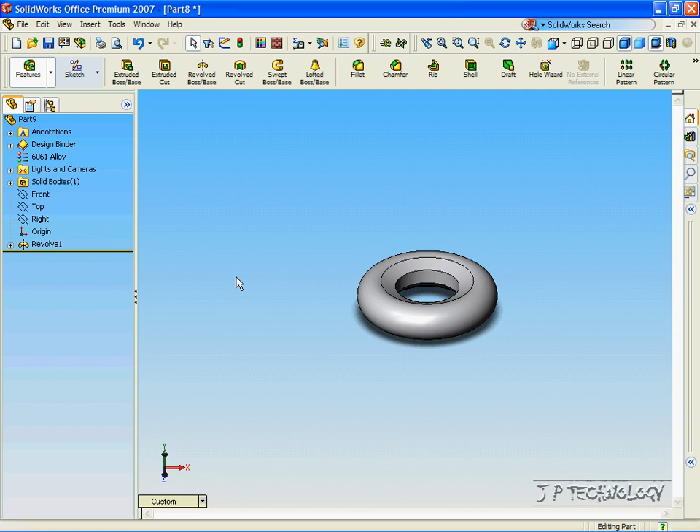Now, the parts that we made in tutorial number 4, we're going to use in tutorial number 5, and we're going to cut them. Press Control Tab and you can flip through the parts we just made before. Now let's go to the pulley wheel, and let's click Front View.

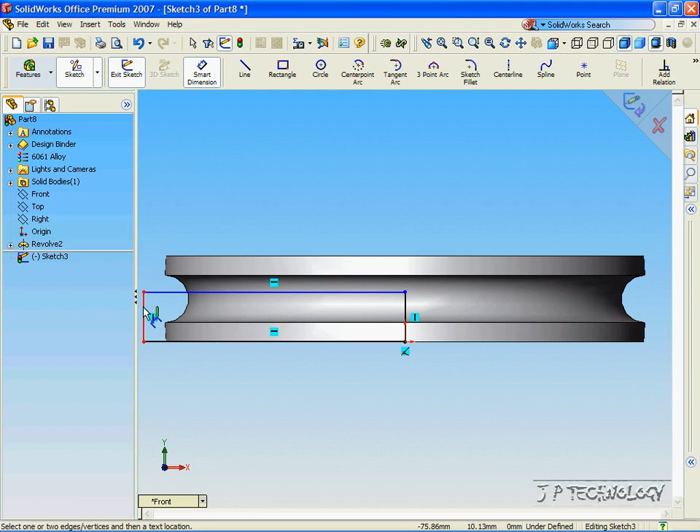Click the front plane, and click Sketch, Rectangle. From the origin, click it and go out until you're totally outside of the pulley. Click there. Now click the Smart Dimensioning tool and click the top line and the bottom line, and we can make the height. For this, let's make it 10 millimeters. Click OK.

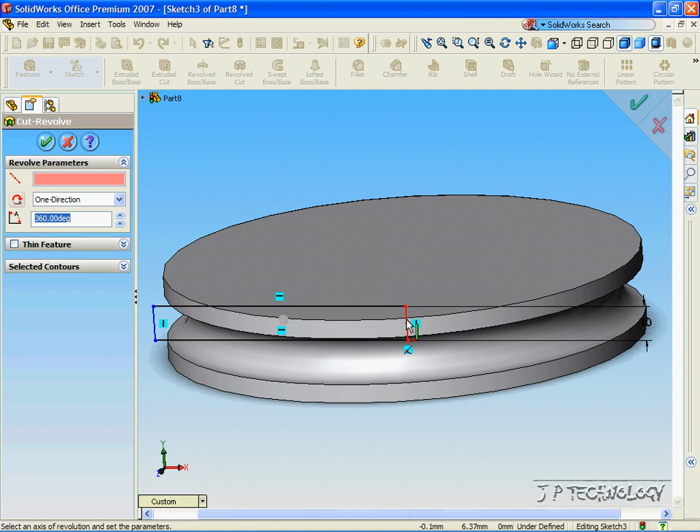Now click Feature, click Revolved Cut, and just like how we did before with the pulley, the axis of revolution is going to be that line inside there. Now click that, and we can see where the revolved cut's going to go around. It's going to go totally around, and it's going to cut what we want. Now click OK, and we've revolved cut the bottom of the pulley wheel there.

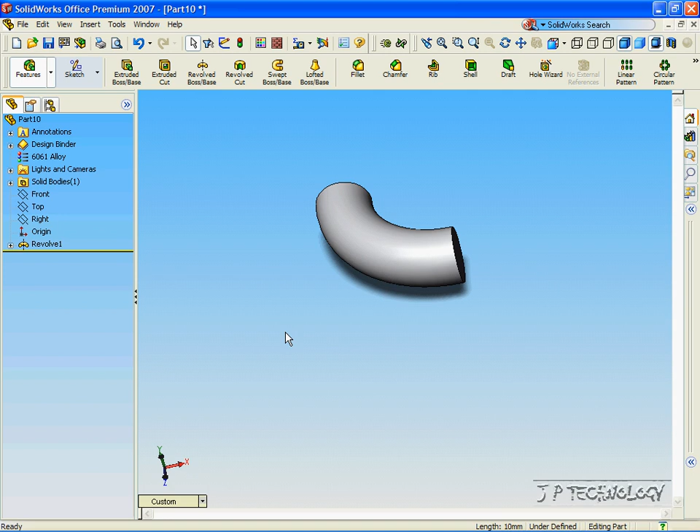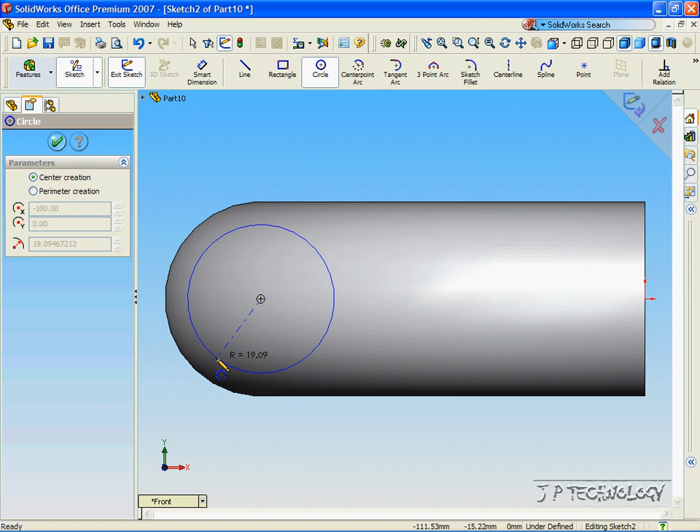Now press Control Tab, and now we're at the 90-degree bend. Click Front View, click Front Plane, and click Sketch, click Circle, and move it onto the outside until you can see the circle that we made from before. Now click the dead center of that circle, and click there, and let's make it 20 millimeters. Click Enter.

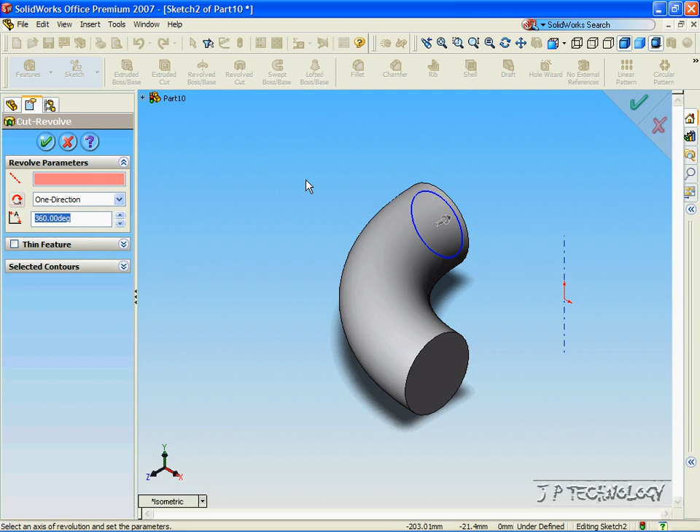Click OK. Now click Isometric View. Now, instead of drawing a temporary axis in like we did before, all we have to do is click View, click Temporary Axis, and we can see a temporary axis that's made with that circle. Now click Features, Revolved Cut, and click that temporary axis that we just put in.

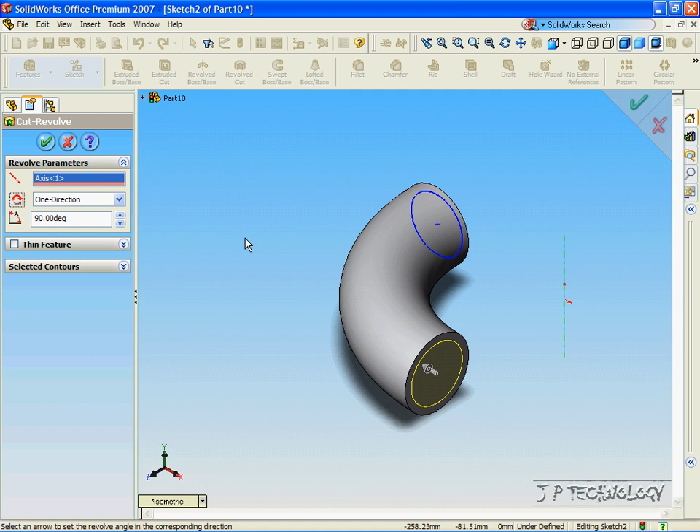And with this, you can switch directions just like the extruding cuts. Let's make it 90 degrees again, just because that's all that we have. And when you flip it, you can see it flips both ways, and that's the way we want it going. Now click OK, and we've cut all the way through it. So now our 90-degree bend is an actual pipe, and there's a hole through it.

Now with this, there's also an easier way to do it. Go into Isometric View. Instead of doing a revolved cut and then from the revolved base that we already made, we can actually just make it from one revolved base. I'll show you how to do that right now.

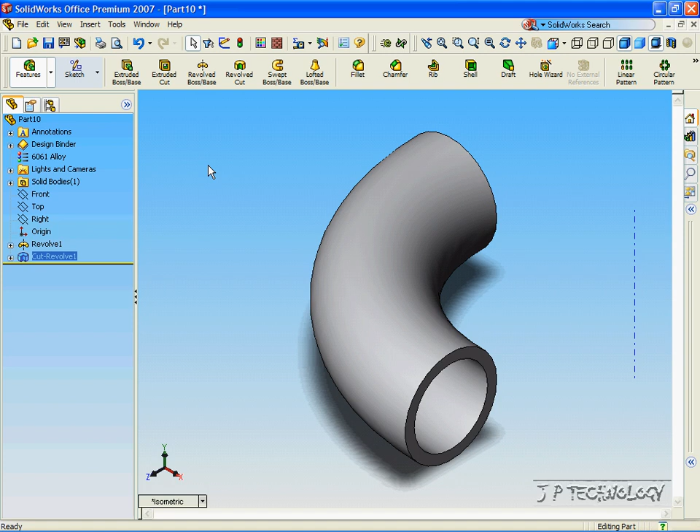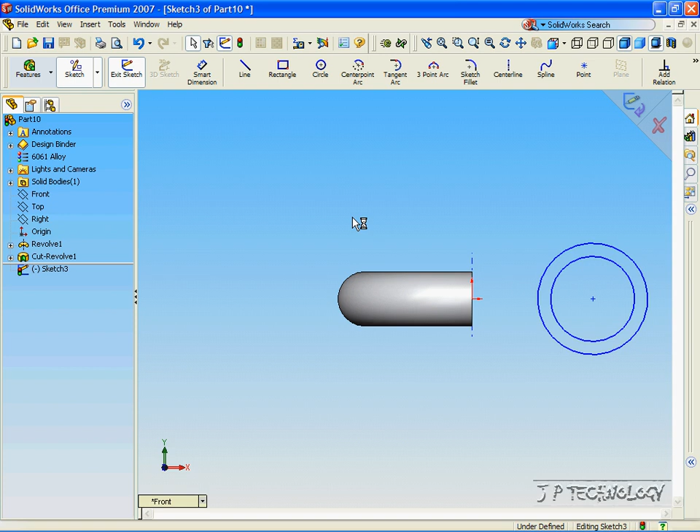Click Front, click Front Plane. Now zoom out a bit. Click Sketch, click Circle. In line with the origin, make one circle, and make one circle inside of it. Click OK. Zoom out a bit more, and let's make a temporary axis to the side of that.

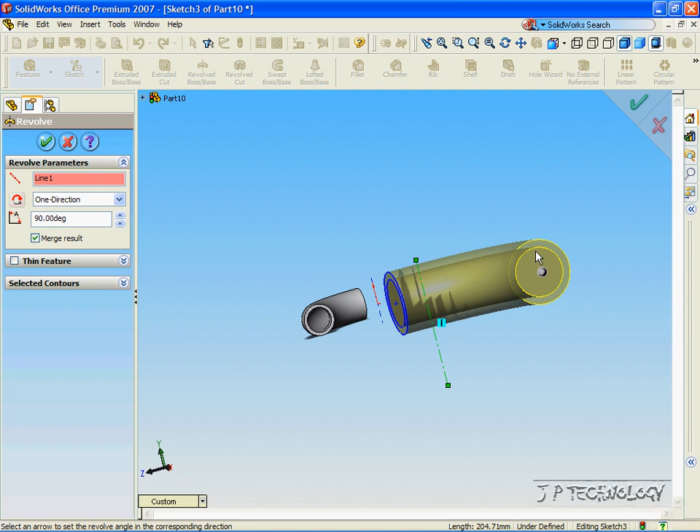Click Features, click Revolved Boss/Base, and let's show the 90 degrees. This time it's just going to do the inside. It's not going to do the big circle—it's going to do what's in between the big circle and the small circle. Now click OK, and we've made a thin-walled pipe.

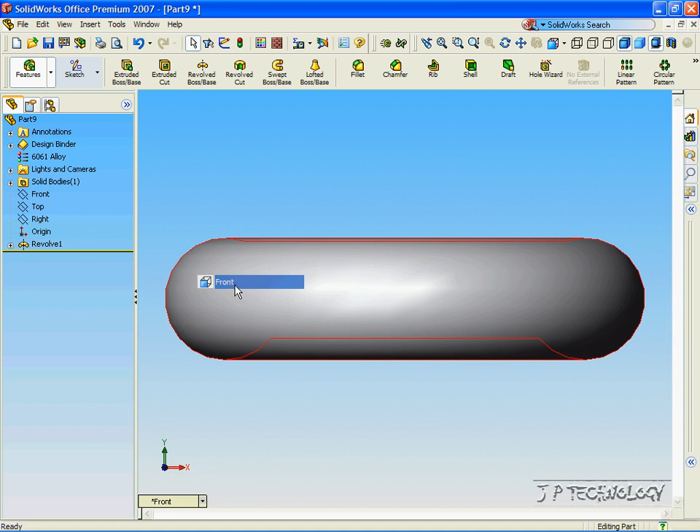Now click Control Tab, and we'll go to the donut. Now click Front, click the front plane, and just like we made a sketch of whatever we wanted before, let's draw another sketch of just whatever on the side, just a design that we're going to cut into this circle. Okay, click OK.

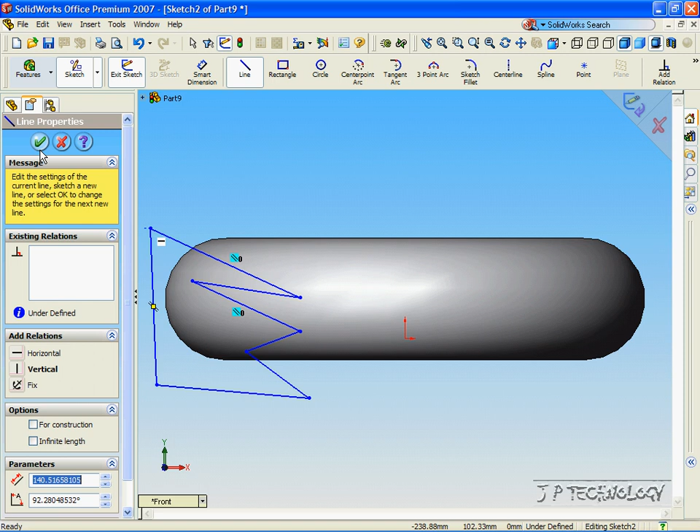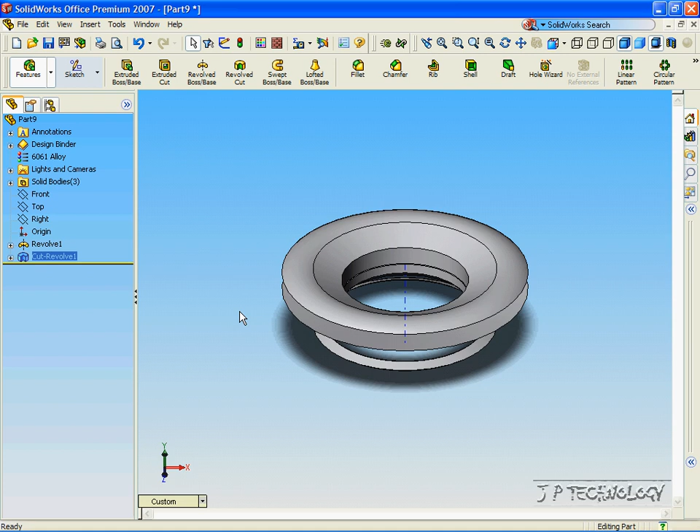Click Features, click Revolved Cut. Once again, view temporary axis and click it because we're going to revolve around that. Shows us the preview. Now click OK. Click all bodies, OK. And we've cut into the donut that we made from before.

And this concludes tutorial number 5.